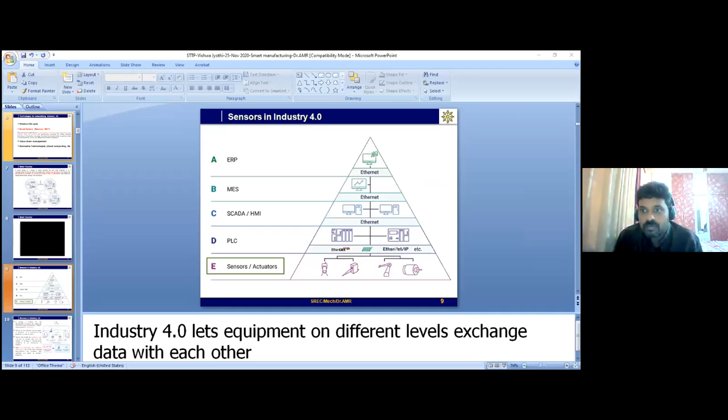Shall I share my contents? Yeah, sure. If my PPT is visible, is there any problem for our participants? It's clear, my PPT is okay.

First of all, I welcome you all to this AICTE sponsored STTP program on IoT-based manufacturing and design, and the challenges and opportunities, by Vishwa Jyothi Engineering College. First, I thank Professor Shanmugesh for giving me the opportunity to talk on this STTP program. As introduced by Mr. Vipin, I was previously a professor from mechanical, and before this year started, I shifted into robotics and automation, heading that department. Currently, the industry revolution mostly depends on automation, so we have introduced this B.Tech in robotics and automation.

So we can start my presentation. It contains around 60 to 70 slides, but don't worry, I don't want to bore you, so we can make more interaction if possible. At the end of the session, we should have some kind of questionnaire session through an online form. I have some questions for you, and also some videos. I'll try to cover the portions I have in mind regarding smart sensors for Industry 4.0 digital manufacturing, so we can start my presentation.

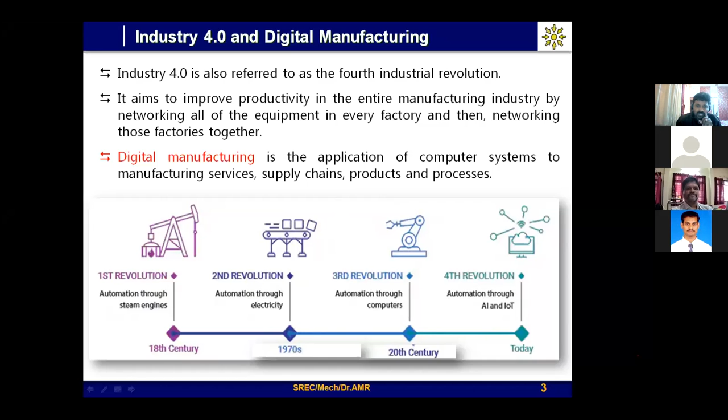When they talk about Industry 4.0, the next word that comes into the picture is IoT - but how are we connecting IoT with industry? That's the word they use. Both are used for the revolution aspect, but generally when talking about control and automation, IoT comes into that picture. So all these may be similar terms, but they are very catchy terms that have been used.

You should always understand this perspective: as we become smarter and use digital technologies, how is data generated, how is data communicated, how is data processed - which will be useful for enhancing your production process, and thereby improving your product quality, flexibility, and increasing your productivity.

But whenever talking about all these processes, finally, without a sensor - the sensor is the primary element in any kind of industry. If you're talking about Industry 4.0, automation, controls, communication, or getting some feedback, ultimately the sensors give you the information - detecting the information, acquiring the information, grasping the information. You can monitor anything through it.

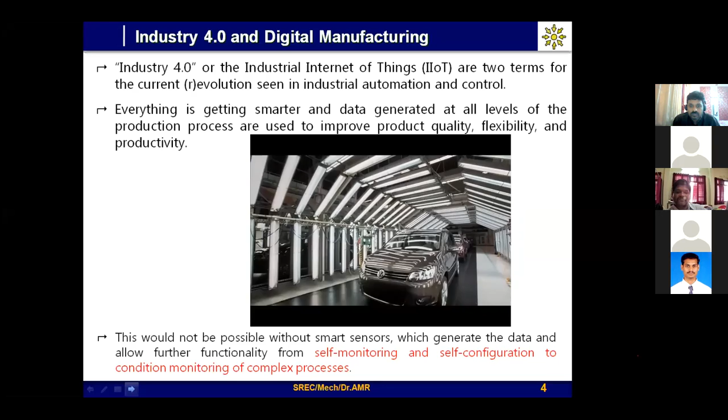Okay, so if you see this particular video, Volkswagen is talking about what's the production today, and what we have in Industry 4.0. Because when we talk about the usage of all the advanced equipment, starting from advanced robotics, then simulation, virtual reality - so many things are there. But the basic sensors play the major role when each and every time we need to sense it and do the operation.

So there the sensor comes in the picture - that's what I've been talking about here. When they talk about Industry 4.0, it starts from the design of the image, and finally comes to the final stages of production.

So how all the image data is converted into the real-time product, maybe a prototype or a real-time fabrication model - at each and every stage, how the transmission of information happens through sensors, at which it will make the final production. That's digital manufacturing enabling all this - it gives you the integrated approach to manufacturing through the computer system.

Ultimately the primary sensing elements will detect this information, like if you are capturing an image starting from your camera. So the camera is one of the sensing devices - it will capture the information, and you transfer the files to the respective manufacturing department.

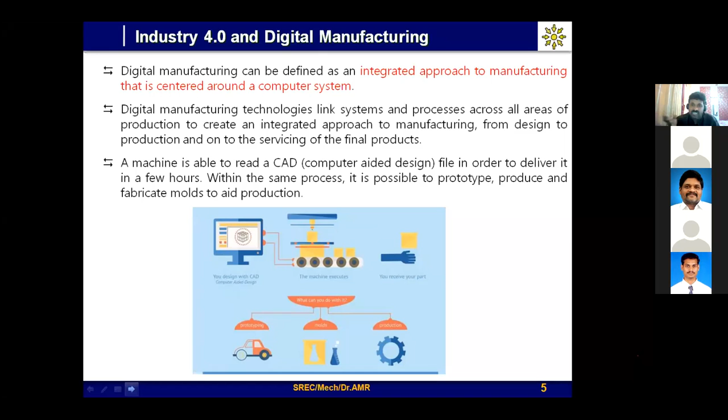So if you are executing the machine tool, any CNC or any kind of machine tool or robotics - any robot - it will go and pick the part. Whenever it picks the part, it always checks what kind of drawing was sent by the client or customer, then it places it in the respective machine tools. Like that, the process starts from digital manufacturing and slowly puts it into the system. So that's what they're talking about with Industry 4.0 and digital manufacturing.

And thanks to my professor - I think he has covered all the topics related to this system. When we talk about Industry 4.0, how we are going to materialize Industry 4.0, we slowly start from the product life cycle.

I told how the product is designed, starting from the entire life cycle of the process - from raw material to the end client and maintenance, and after the post services, post usage also. So they have been talking mostly about the product life cycle, starting from raw material to the end of the product. The second important thing I have to convey here is the smart factory, or digital factory, or smart industry, or smart manufacturing.

So it mainly plays with smart machines. We can say smart machines means we are placing intelligent sensors there - how the intelligent sensor connects with all other devices in the smart factory or smart industry. That's what they're talking about here.

So it involves the use of smart machines, sensors, and other tooling devices to provide real-time feedback. This is very, very important - it gives you real-time feedback while executing tasks in manufacturing. So this is a digital transformation, through all your sensors and internet communication devices, at which you are enabling the digital factory or smart factory.

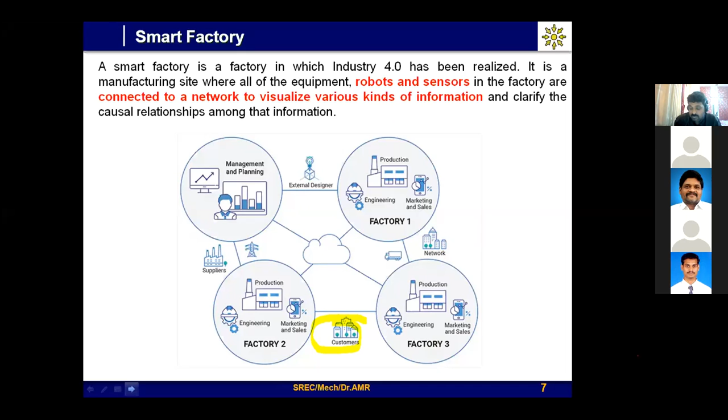So that's where the smart factory comes into the picture, with orientation toward customer feedback and the customer's expected quality aspect. That's one of the very important ones.

Now, there is one more video about the smart factory. What is the purpose of the smart factory? Everything will be explained.

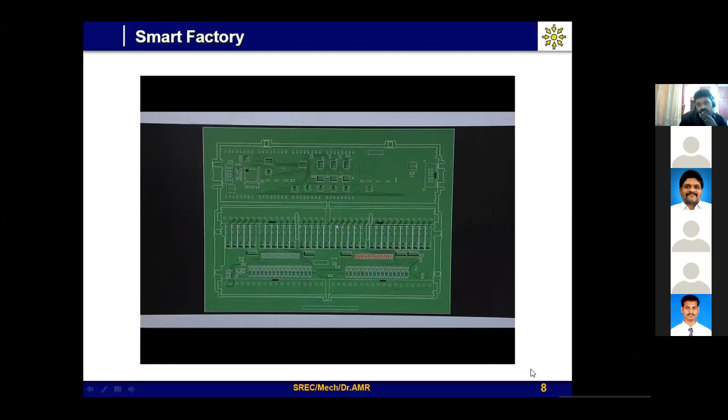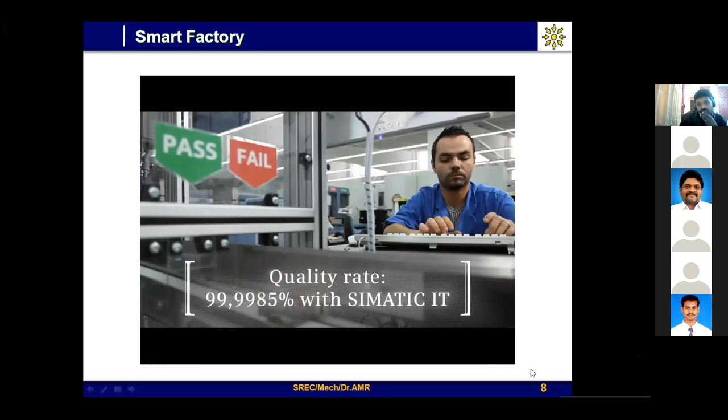If you could see here, when Siemens talks about design to cost, design to logistics, design to make a quality product within a specific period of time, they have to make a simulation. Once they make a digital prototype, they further simulate the environment, then go for real-time manufacturing to ensure good quality of the product.

There, they make use of smart sensors, when they talk about the Siemens industry software. They have ready-made smart sensors integrated with their systems, ensuring production capability wherever they want to make a new kind of layout system, smart industry systems.

Now coming to smart sensors, where the smart sensor plays a role in any kind of Industry 4.0. If you could see a pyramid structure, they're talking about the Siemens software system here: Manufacturing Execution System (MES), SCADA, ERP.

They've talked about all this perspective, but when I come to the basic level, sensors and actuators are the most important devices used in any kind of industry. This is the bottom of the table. It only gives you the quality of data, the data to be communicated, and it controls the entire process to be automated.

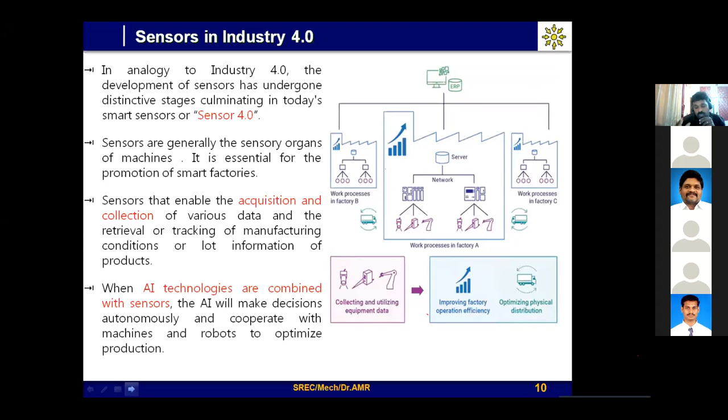That's what sensor 4.0 means - generally sensors only talk about sensing, but here we have to talk about starting to think. So we have to take the decision, sometimes self decision or self controlling or self diagnosis or self calibration. These are the functions that can be carried out by these sensors.

That's the way sensors have to be designed now, because once upon a time sensors only gave you transmitting, transforming of the information. Then we had a lot of electronics where analogically we had to get the value, or manually represent it, but nowadays it's not like that. We have sensing electronics built into the sensor which generates the data, and we have small memory space and a processing unit which takes the decision. That's one of the major digital transformations happening in industry 4.0 when using smart sensors.

So that's what the prognostics talk about, all this information, and cloud-based IoT and digital twin. Digital twin is based on sensors - it is the base for simulating the virtual real-time environment using the data collected by sensors in smart machines. This was a study they talked about 2 to 3 years back, around 2020.

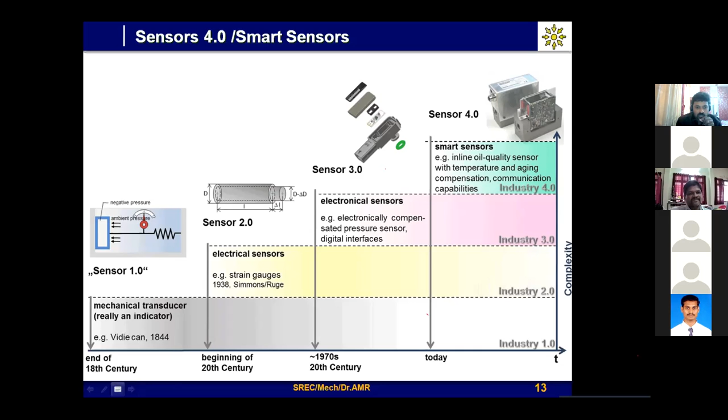Similarly, we go with connecting with our human - taking all these 5 organs like smelling, hearing, touching, tasting, vision. It's always a very complicated mechanism we have, but we convert it into an electronic brain using sensors, because we use all of these.

Like if you see this particular film shown in 2014 - hopefully I'm not exactly sure if it was 2014, a long time back - it's about a superior brain.

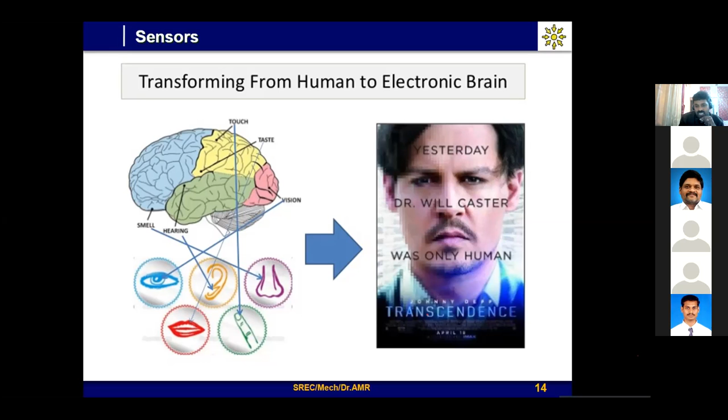He is predicting something, he already knows about this in advance. So some kind of, I go with the superior state. Similarly for the sensors we have, we have to go with a particular stage or we don't know, because some of them have some kind of capability. They can identify, they can predict. But how will smart sensors come into the picture, because these sensors mostly we have taken from what we have seen, what we have touched, what we have smelled, what we are hearing. Based on this only we have been using it in industry and commercial automation purposes. But finally, how does it go to a superior state, how intelligent enough to identify itself? So that's why they're talking about this.

You know that sensors are already everywhere, so we can't avoid them, because whatever technology so far we are using in our day-to-day life, we cannot avoid. It starts from washing machines to digital thermometers, and whatever we are using, car, camera, or anything in mobile phones. So everything will be digitized.

Whatever value exists, it will give some kind of quantity of information, but we have to ensure what kind of quality of data is given by the sensor. That's the biggest problem, the biggest issue when talking about sensors from this point of view. That's one of the major ones. Whenever I'm talking about sensors, this is one of the major problems, because sensor data gives a lot of information, but how do we identify if the information is really realistic or not. So that's one of the major ones.

The next thing is, when talking about sensors, you should know what kind of types of sensors there are and the role of sensors in any kind of industry. Suppose you're talking about Industry 4.0, how does the whole range of sensors connect with all this? That's what I'm listing.

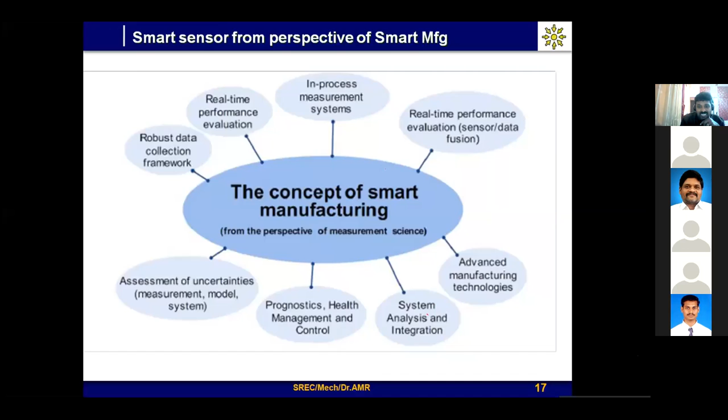Then other things like system analysis and integration, other advanced manufacturing like 3D printing, additive manufacturing, are now evolving—that's what in the measurement science aspect. So you need intelligent data analysis, that's where big data and data science come into the picture.

Apart from this, the other most important factor I want to convey here is how we are going to select sensors for the application—the key performance indicators when you're going to choose your sensors for the application.

The other important thing I want to say is about connectivity. Connectivity now is not a problem at all. Mostly we should have more usage of Bluetooth, wireless, and hardwired things are there. For hardwired, there are ready-made communication buses available, so we can easily integrate with any kind of system. You only have to initialize the file, then you can execute the data from there. It's possible now, but in old days, traditional methods required you to keep entities separate and join them together—you had to write your own program. Now each and every entity is combined with all this information, finally giving you the physical information about the particular world.

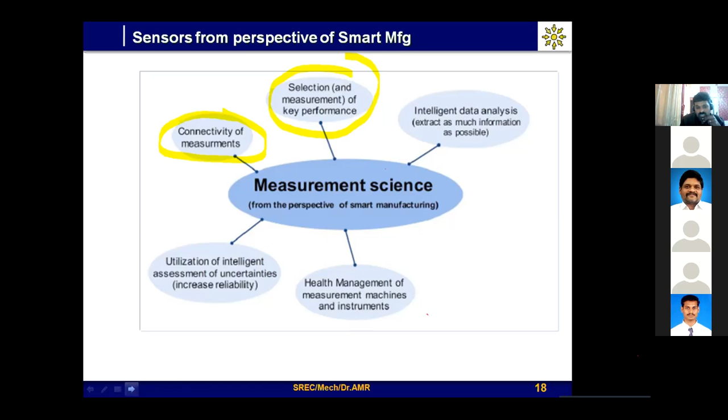Now come to the sensor machines. If you have any machine in your industry 4.0 setup, you could see pressure sensors, proximity sensors, biosensors, position sensors, RFID tags. If you go with any kind of digital industry, you should have these kinds of sensors. I will come to them one by one—some of the sensors I will go on to explain.

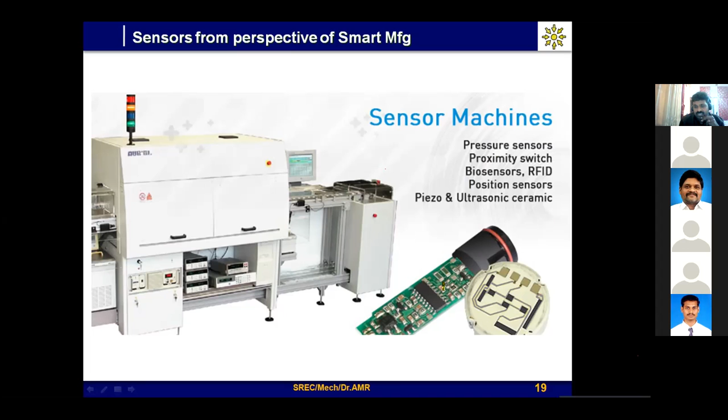We are using n number of sensors, and the connectivity of these sensors will determine the quality of the laser process. So sensors only give information about the environment in which the equipment or tools are processed. Based on this, we provide information to the process so it can carry out the operation.

Similarly, for smart inspection and smart metrology, which is my area, if you talk about any probing system or any laser system, the sensors primarily sense whether to touch the component or not. With the non-contact aspect also, it gets information from the product or component we want to measure. So these sensors give you a combination of information.

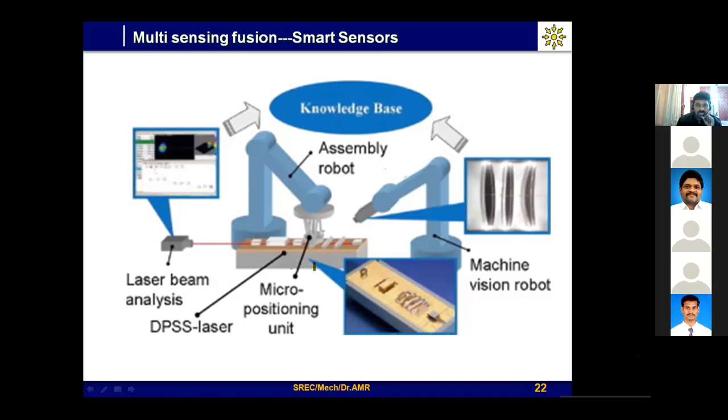They have to make some kind of standard for how we ensure the data which comes from one sensor, then check it once again from another sensor. This is evolving slowly, they're talking about this kind of multi-sensing fusion in smart sensing technology.

So far I've talked about how sensors in Industry 4.0 slowly evolved into smart sensors. Generally, sensors measure or detect real world conditions, but what can smart sensors do? It's a simplified electronic design. Whatever you've seen in sensors is there, but it simplifies the electronic design so it's ready to go for any application, including all kinds of information processing units.

It's going to detect, but finally there's a processor that analyzes your value, analyzes your image, and transmits the information or stores it in memory. Some kind of memory unit is always there. Whenever the next process needs the information, it will transmit it to the next stage for further processing.

Mostly smart sensors are the most important for any kind of original equipment manufacturers, because when they want to ensure quality, they always expect to know what kind of smart sensor is being used, and how we are integrating it with their equipment and machine tools available in the system.

Smart sensors are microprocessor driven. They include communication capability and onboard diagnostics, giving information about the system. Finally, if everything is there automatically, it gives you good efficiency, and we don't need to measure anything manually. It gives you all stored data to be processed for further usage.

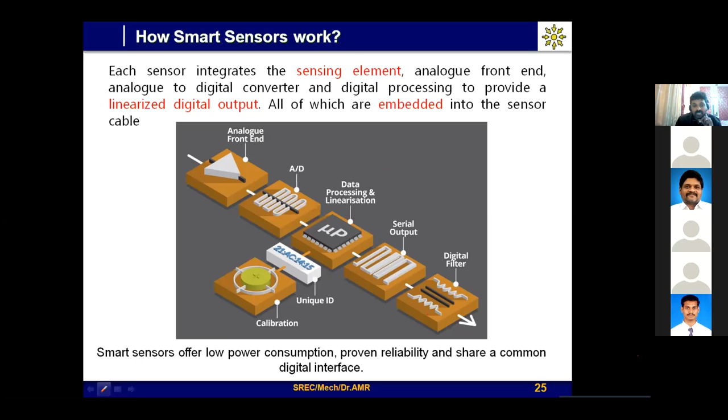It is always embedded with a processor. Nowadays people talk about Arduino, Raspberry Pi, and many such devices because they have low power consumption and good reliability. But if you go with long mission-critical protocols, it won't work out - generally these are used for smaller applications or prototype models. After that, we should go for robust controller designs, which are only possible for implementing robust smart sensors in Industry 4.0.

So when talking about smart sensors, it's a combination of a sensing element, analog interface circuit, analog to digital converter, and finally the communication bus - all housed together. If you could see here, this is the primary thing, which then connects with whatever system you want.

Similarly here, the primary thing connects through wiring, this small device here. It goes through, and you can connect it wherever you want, to your environment, with other systems and other integrated elements also. So additional functionality mostly depends upon the smart sensors.

We have self-testing, self-identification, self-validation, and other capabilities like calibration and diagnosis. Sometimes there are multi-sensing capabilities - some sensors like proximity sensors are able to measure displacement, and also give you acceleration and other readings. This is also possible when talking about sensors.

Okay, so these are the points about smart sensors. If you could see here, when talking about the functionality point of view, one of the major ones is that the factory equipment is the first primary element.

When connecting smart sensors, the motor is a basic device. How are we going to identify heating in this motor? If heating occurs, you have to stop it. So how will the smart sensors give this information through communication to your control center? Sometimes the smart sensor waits for the control center to give information to react, or sometimes self-diagnosis automatically stops the process. These things are majorly monitored by smart sensors. Monitoring and analytics play the major role, because for communication and controller aspects, a lot of ready-made devices are coming into the picture.

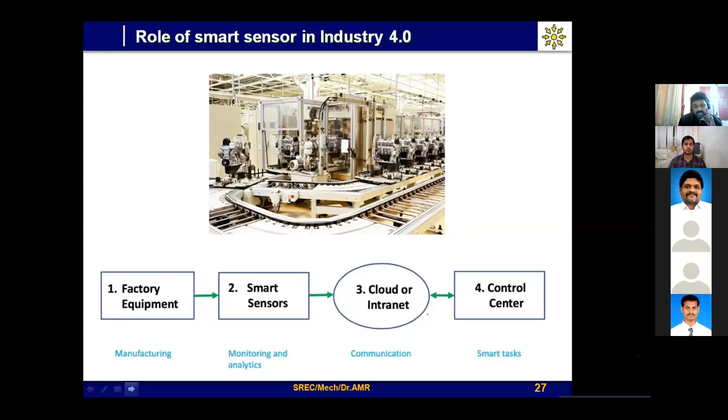But the thing is, monitoring and analytics data is always varying. It's not common data regardless of the system, depending on the industry environment. Suppose today you're manufacturing one kind of component, tomorrow a different component - the same sensors are being used. So how will these sensors play the major role with different sensor data, connecting with your current system? Let me show a video about the difference between a temperature sensor and a smart temperature sensor.

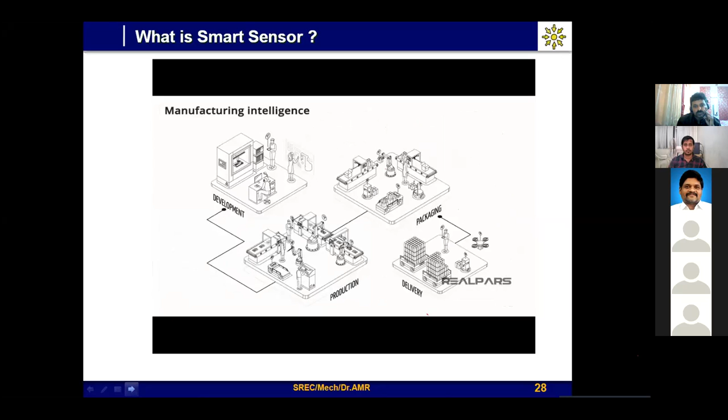From the manufacturing intelligence point of view, this shows how smart sensors communicate data, self-assess, self-diagnose, and calibrate to the physical world they interact with. Here you can see the same sensor can measure displacement or distance between objects, and also measure temperature. So with multi-sensing capabilities, a single sensor is capable of transmitting data to your control center for further processing.

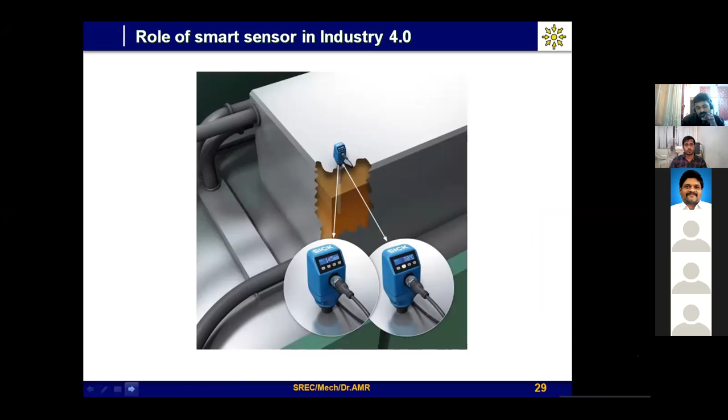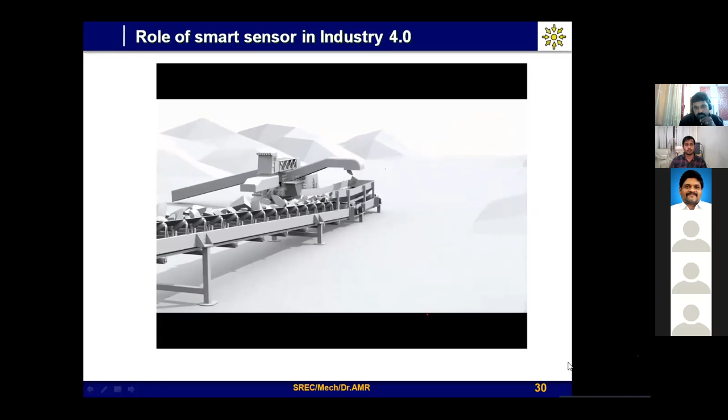Let's see one more video - ABB has a smart sensor mounted on bearings, showing how the bearings can give smart information as they go through your conveyor. I think hopefully you can see this.

In this video, you can understand how smart sensors can transmit data, particularly detecting any fault or heating in the smart bearing. The fault diagnostics can be identified by the sensor. This information is further processed through connectivity, whether wireless or wired. Finally, some small apps come into the picture. Based on the data information, the apps process that information and tell you whether you have to change it or not.

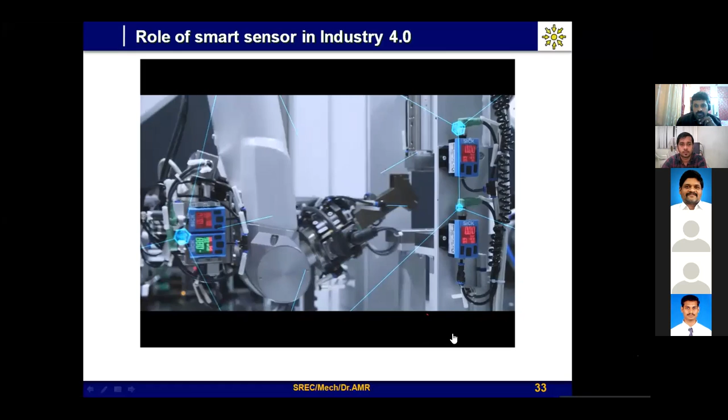Here's one more video - you can see how many sensors are placed in these smart sensor setups in the robotic environment.

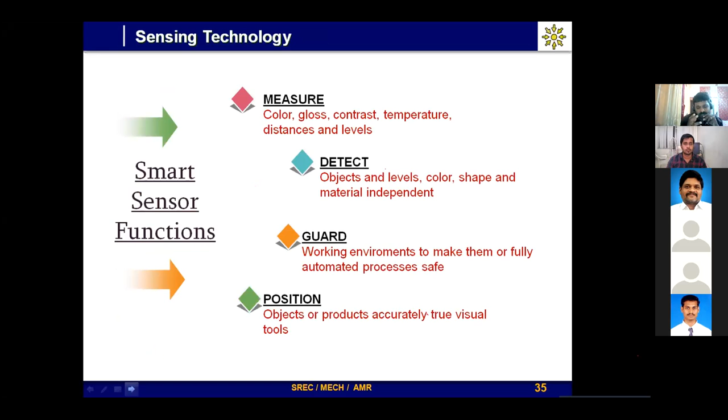The common general functions in a smart sensor are measurement, detection, guarding, and positioning. These are the common basic sensing capabilities of any kind of sensor.

So you have to decide what kind of sensing technology to use, whether it's simply descriptive, giving only information, or diagnostic for usage in the next measurement, or maybe predictive and reactive, where you have to take some decision for the future to work on the particular system or integrate with other systems. Generally this goes descriptive, diagnostic, predictive, and now prognostics comes into the picture.

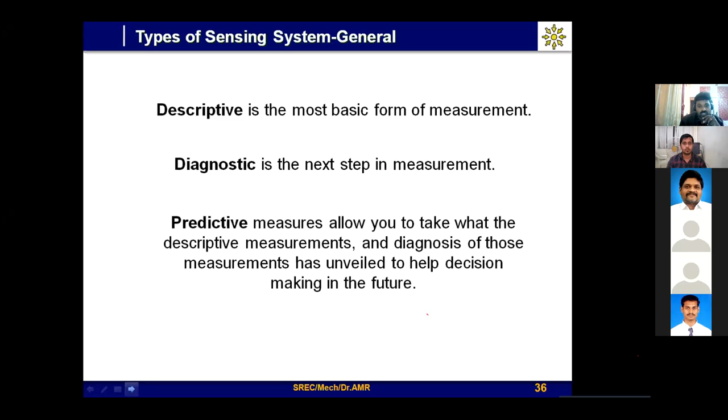Predictive and prognostics are what most sensors nowadays talk about in terms of sensing capability. I'll go quickly through this aspect since these are things you generally studied in your engineering degree as the basics of sensors. Hopefully most of you are from mechanical and electrical backgrounds.

How suitable is it to the environment? This is one of the major considerations. Contamination will happen if you're using a harsh and hazardous environment, so how will the sensor react in those environments? This is also important.

Other characteristics include sensitivity, accuracy, and precision. These are common measures of how it deviates from the true value - what kind of error we can expect, how we calibrate, and how self-calibration works. These are the things to consider regarding sensor characteristics.

Similarly for sensor fusion, as I mentioned, sensor fusion is now slowly emerging once again because one sensor is not enough for getting the data. We need multiple sensors to get information, and we have to work out the combination of all these values, combining them to process and get the required value. This is going to happen more in coming days - multi-sensing fusion capability is one of the major routes I'm talking about with sensor fusion.

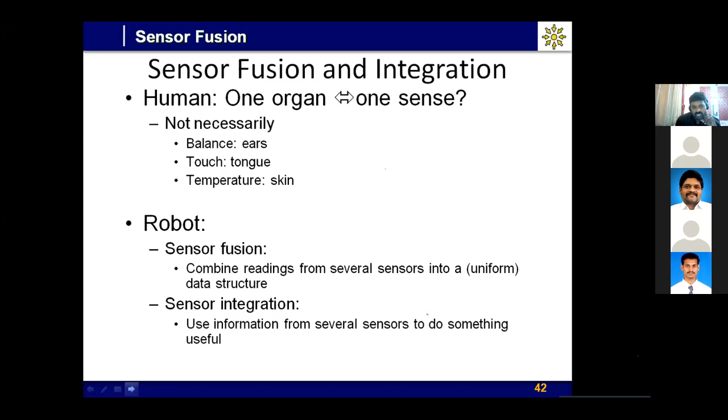If you need high resolution and high precision, this becomes the biggest problem. I have suffered a lot when dealing with high resolution combined with small sensing capability, like 0.1 mm diameter or 0.2 mm. That's a big challenge. We tried L&T technologies in one project, working with a 0.5 mm camera.

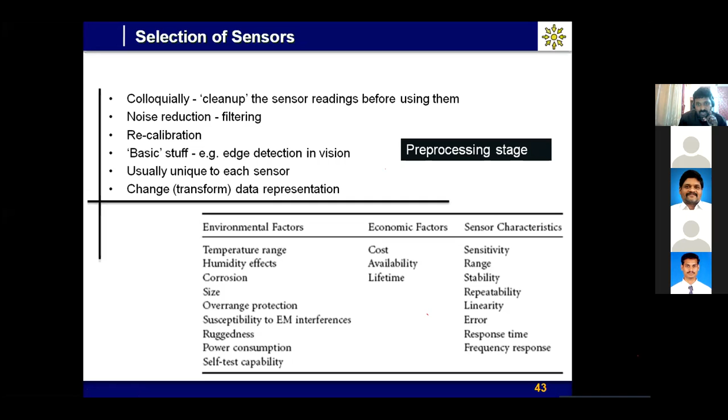So cost and availability is one of the biggest problems. Apart from this, other things like accuracy, calibration, cost, and range. These are the common issues.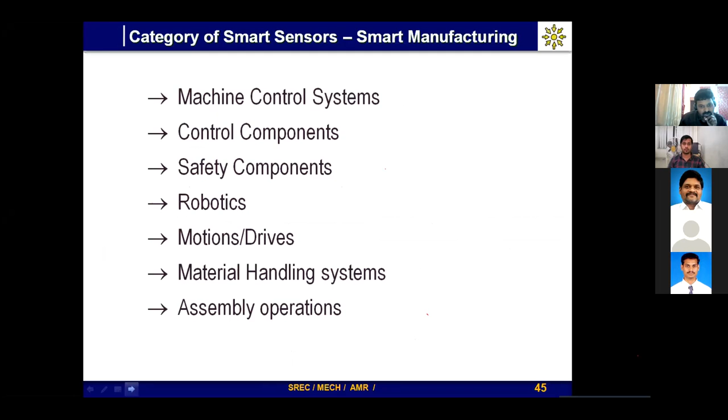Apart from this, categories where we can use smart sensors include machine control systems, control components, safety aspects, robotics, motion aspects, material handling, and assembly operations. Mostly these kinds of applications have been used.

If you list out the number of smart sensors, whatever category, starting from temperature, pressure, all kinds of sensors, mostly they have been used in all industry applications, always embedded with a processor, microprocessor unit. So it was driven such that once upon a time we had to integrate with the whole machine, but not now. Now each sensor has its own microprocessor.

We only have to collect that data through a common controller, and you get to process that data at a checkpoint. You only have to write a program on those sensors, then that's more than enough. You only have to command and integrate through your call function.

Then from the call function, using a remote function, it's like a function that comes into the picture. Once upon a time you had to write all the programs continuously for the particular value, whatever you were getting from different entities, like from a digital voltmeter, then finally read those voltmeter values and process it. But here it's not like that.

So each function you can easily call and execute. Generally, these are the different types of sensors available in the market: photoelectric, magnetic type, capacitive type, and photoelectric reflective type. These are the mostly used sensors from an industrial applications point of view.

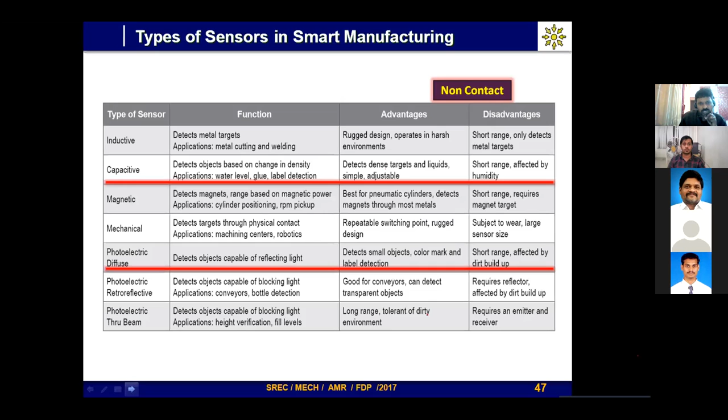So capacitive, photoelectric through-beam, retroreflective - these are the common sensors used in smart sensors for industry 4.0 applications. This is one of the sensors I used in my research, when I characterized the profile and identified surface damages as one feature, through my capacitive sensor with 0.5 mm.

It's a capacitive sensor. If you look here, we cannot predict it directly, but when you take the measurement, you can see the changes in the voltage. It's not just a small sensor - we have the sensor, then different sensing electronics, and finally I modeled it and predicted that information.

So if you have that data and feed it into the microprocessor - nowadays all the Arduino embedded boards are coming into the picture - I can write those codes and it will automatically execute. It becomes a smart sensor when you use it in any kind of industrial application.

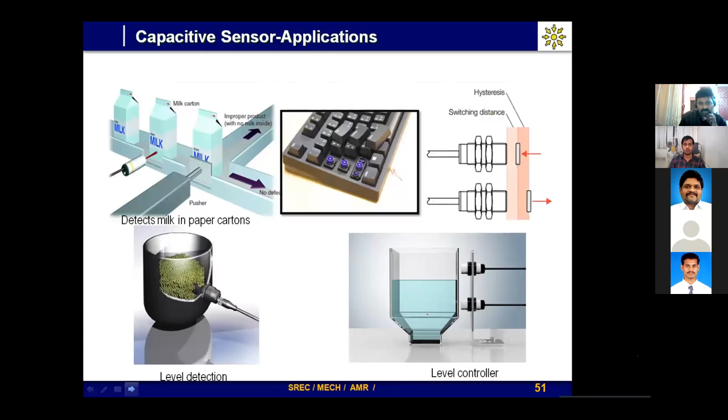So there should be a number of applications for the capacitive sensor because it's highly sensitive when you maintain the gap between the two sensors. Any small change, any displacement, it will identify - the direction, the presence of an object. There are many applications when talking about capacitive sensors for industry 4.0, mostly for displacement and presence of an object.

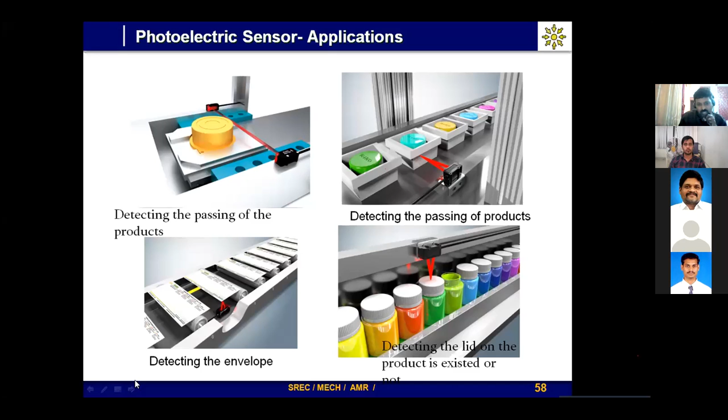So like that, we should also look at photoelectric sensors. I'll go through this a little quickly - I'll give you these slides. I think these slides are commonly already studied, so I'm just talking about the details of why we need to go for smart sensors. Other things you can easily interact with on your own.

So I'll quickly go through all the photoelectric sensors, then image sensors - nowadays they talk about these because of image vision. We have been working with bimetal bearings for dimension measurement. This was one of the difficult processes we encountered with the bimetal bearing.

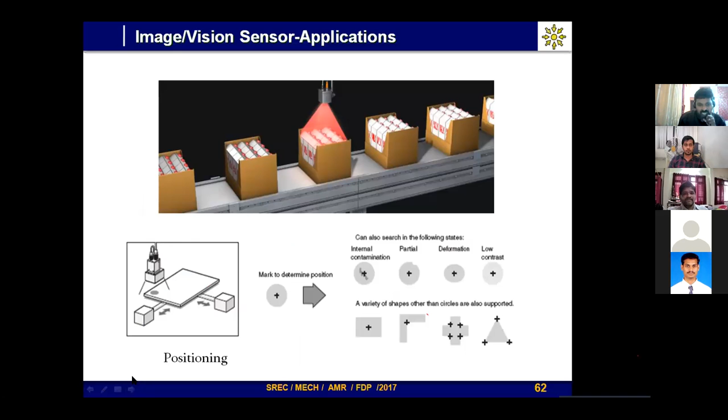One of the project works, for 17 lakhs we got it, was to measure different dimensions of the part automatically by identifying and orienting the part, and finally measuring all the features in the bearing ring dimensions and checking for any damages through an image vision system. We placed 4 to 5 machine vision cameras at different orientations to identify the fault.

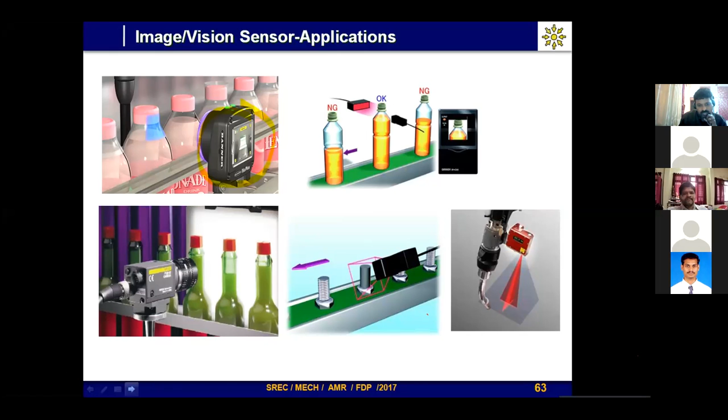So we should have most sensors as image based, optical based, capacitive based, and inductive based. Other electronic sensors are used for industry applications, mostly for high-end, higher distance applications, since capacitive or inductive sensor ranges are limited. Ultrasonic sensors are used mostly for higher end, high distance applications, also for direction and presence detection of objects, mostly for underwater applications, but apart from this they are used in different applications.

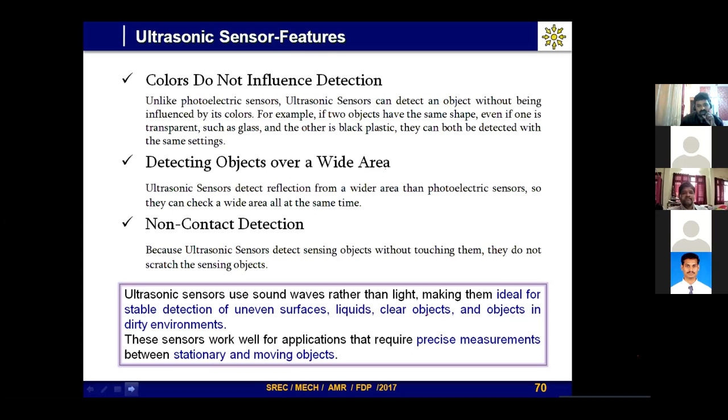Ultrasonic, capacitive, and photoelectric are common non-contact sensors. They won't be influenced by colors or aspects like shape. But with proximity and line-of-sight through-beam sensors, any complex shapes can also be easily measured. It depends upon the application which one we have to use. Even for uneven shapes, you can use ultrasonic sensors.

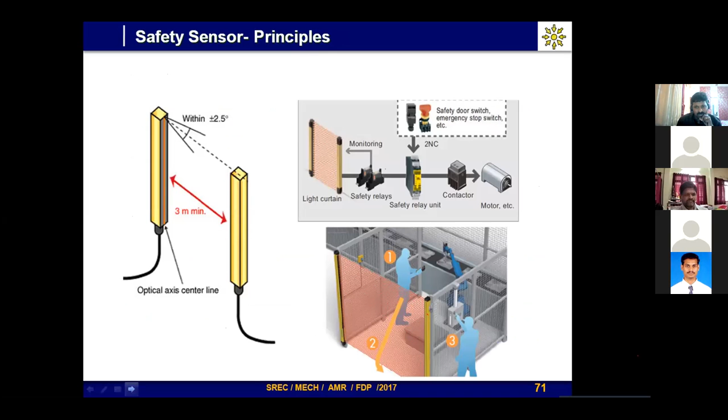Other safety sensors like light curtains, proximity sensors, relays, and limit switches are commonly used devices in industrial applications. Rotary sensors and internal sensors are mostly used to know the position of the tool. Based on this, these kinds of sensors have been used.

So all these sensors nowadays are mostly embedded with the system. Slowly they are making it embedded with the system, connecting with electronics and microprocessors, and finally they are used as smart sensors in current industrial applications.

The current challenges for smart sensors include product flow, because time is one of the major features. The motion handling of the sensors becomes a major factor when talking about Industry 4.0 and production flow. So we always have to talk about smart sensors and the time taken for getting this information - this is very important. Motion, if present, is one of the biggest problems here.

Okay, next thing is - my audio is okay, I think somebody said that my audio is not there. Okay, anyway, okay sir, okay sir.

Then the other important challenge in smart sensors is the environmental aspect, because harsh environment, hazardous environment, and contamination are some of the biggest problems. Even if you use a highly robust design smart sensor, some kind of malfunctioning can occur and we have to go and replace it. So these problems occur, along with costing issues. If there are self-diagnosis issues, that's okay, but sometimes if you have full self-diagnosis, the cost of the sensor becomes much bigger.

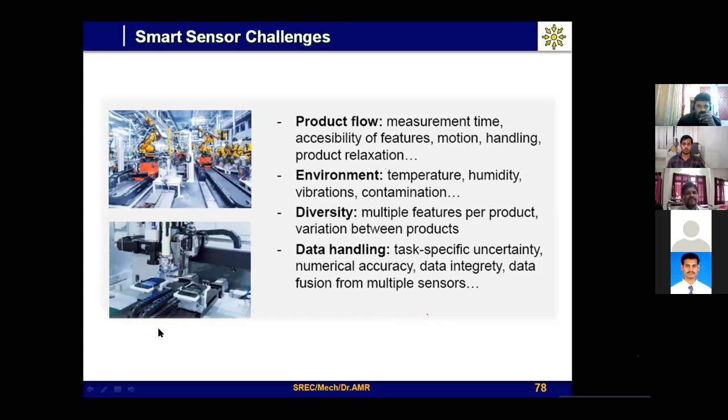You know that in today's hyper-competitive world, speed, accuracy, and reliability are very important. So in the smart factory too, we have to go with speed, accuracy, and reliability.

So you have to use the appropriate smart sensors, because sensors are the heart of smart manufacturing, because these are the eyes of smart manufacturing. Heart also we can say is eyes, because without this, if any one is malfunctioning, the smart system won't go on. So this is very important. That's what the new generation mostly depends upon, how the intelligences are connected.

Finally, one more thing we want to check, because cost of the sensor, the sensitivity of the sensor, integration with other systems - still they have been talking about this. Nowadays currently there are a lot of sensors coming in the picture, but the good sensors, especially smart sensors, are a little bit costly, even though we have been talking.

Apart from this, choosing the sensor - the other important thing is it should be appropriate to your current requirement. So that's another important one. Then apart from this, there's this word 'big data,' because you are generating data through your sensors. So processing the data and predicting and prognosing is one of the biggest challenges.

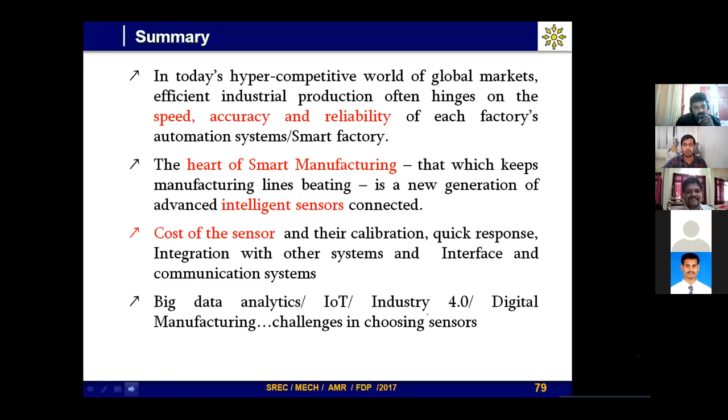Thanks for your support. If you have any questions, please - I have one or two questions with me.